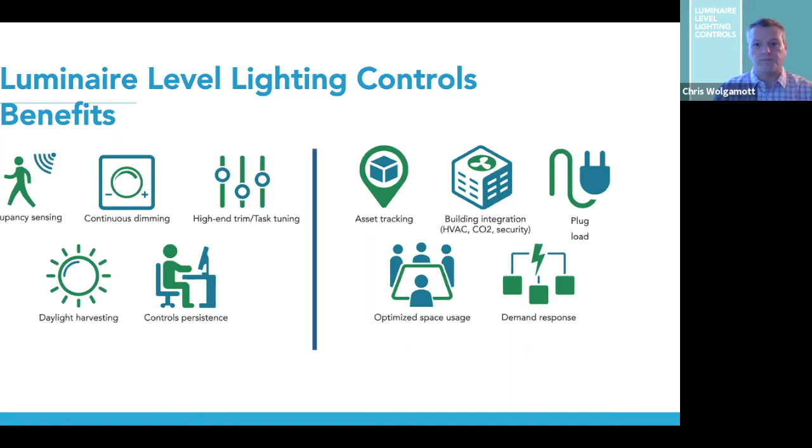All right, let's go to the next slide.

So the first report I want to talk about is an energy savings report that has been done twice. The first one was done by the DLC in 2017. And then NEEA and the DLC redid it this last year, so 2020. It's about a year-long process to do this report because we've got to get the data, work through everything.

And the reason we did this again after the 3-year mark was we increased the number of manufacturers of the products. We increased the size and the number of buildings that we looked at. We added a building type that we didn't have before. And this time we were able to analyze the effect of high-end trim versus the other control strategies. So this is kind of an interesting thing because it shows how much trim work is being done when you're using these types of systems. So let's just jump right in and talk about it.

The next slide is the finding that is pretty consistent with the last one. I think the first study came in right around 49% energy savings for all network lighting control products. And that came in again this time. Network lighting control products came in at a 49% savings. So that's the big takeaway for the network lighting thing.

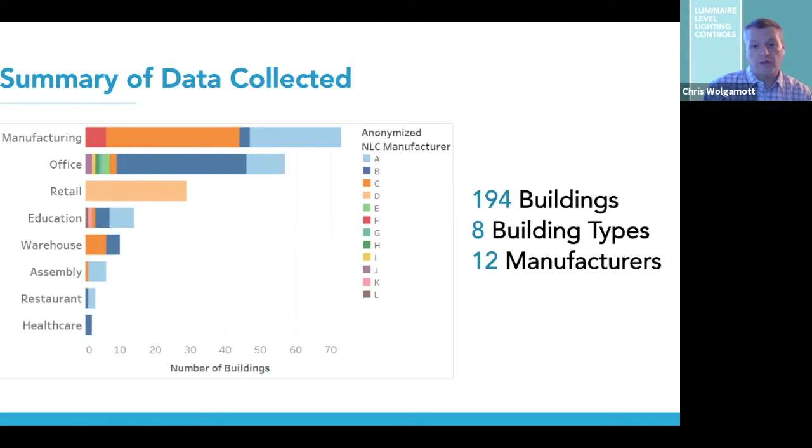Where do we get all that stuff from? We basically covered most of North America. We had 35 U.S. states, 5 Canadian provinces, and Mexico. So we got a pretty good, well-rounded look at where these products were getting installed. And as you can see, of the sample size, they're installed in quite a few places. This is just the ones that we're able to get data off of, and that doesn't count for what the actual installs are. So, next slide.

So part of this is normalizing the data. One of the unfortunate things with all this is that the data that we get from everybody is not in a universal format. It's all in a unique data format. So we had to take all that data and normalize it so that it would present the same information when we looked at it. So we weren't looking at apples and oranges, we were looking at apples to apples. So we had to go through, and this took a lot of time and effort. The fortunate thing is that a lot of the programs that we had to do, we had done in the first study, so this carryover wasn't nearly as difficult because a lot of the formats were known, and we had a way to normalize them. All right, next slide.

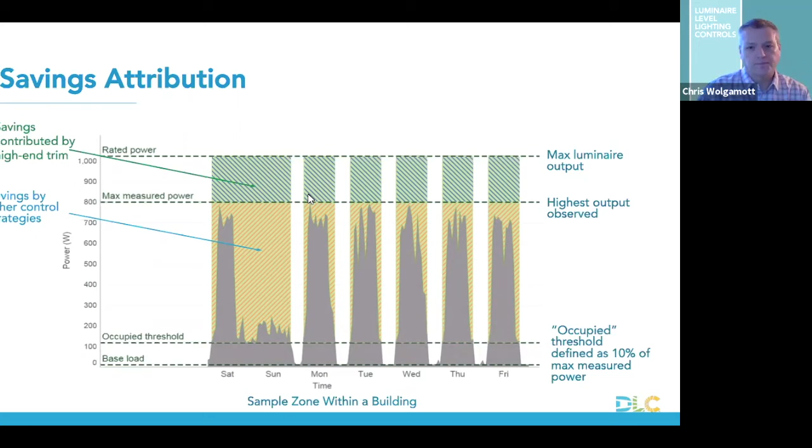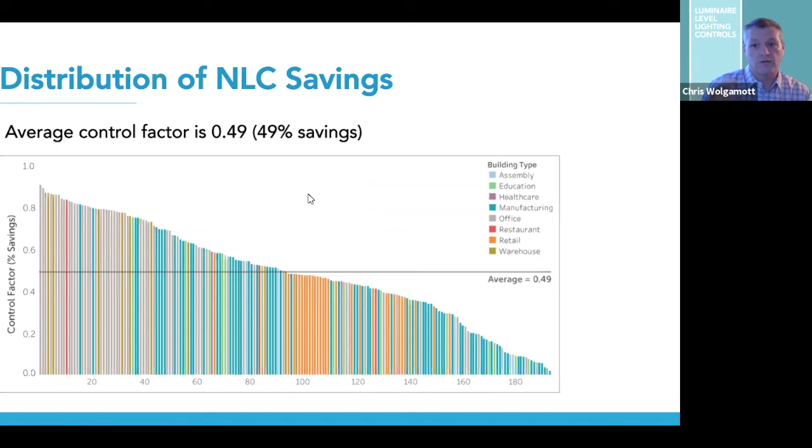All right, so again, we saw this, the average control factor across all building types and all network lighting systems was 49%, which is a pretty decent savings. And this does not account for anything that's the fixture savings. This is strictly the control savings. Nothing to do with savings going from a fluorescent fixture to an LED fixture. This is strictly the savings for the LED fixtures or the new fixtures that are in place. Next one.

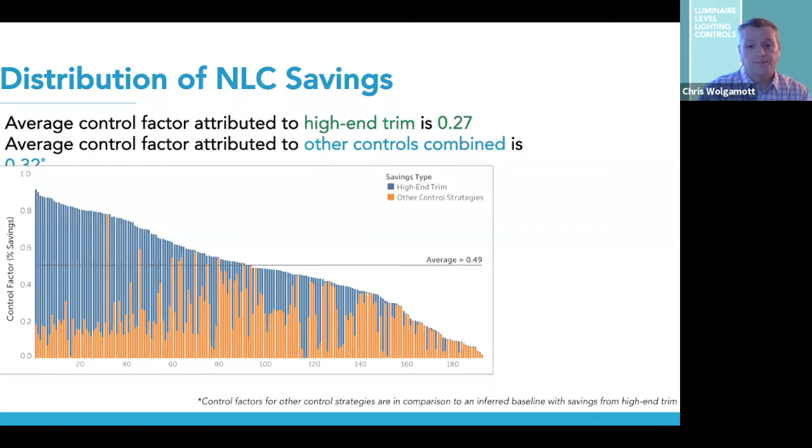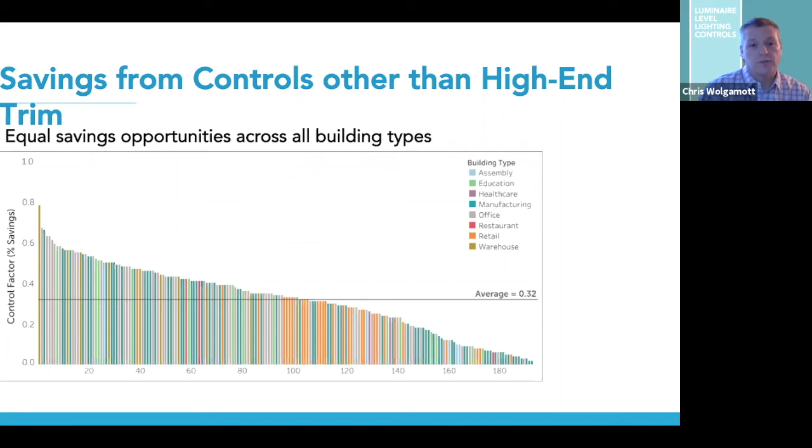And then, yeah, so this just highlights that 32% for the savings from the other control strategies, right? So still pretty good numbers on average for network lighting control. Next slide.

All right, so this is where I get excited. This, for me, is the telling feature, is that if you look at LLC and you separate that out from all the non-LLCs in the network lighting controls, the average savings factor for luminaire level lighting controls is 63%, which is significantly higher than the 49% when you average all the network lighting controls. And so we're seeing a much greater energy savings with luminaire level because of the granularity and capabilities of it.

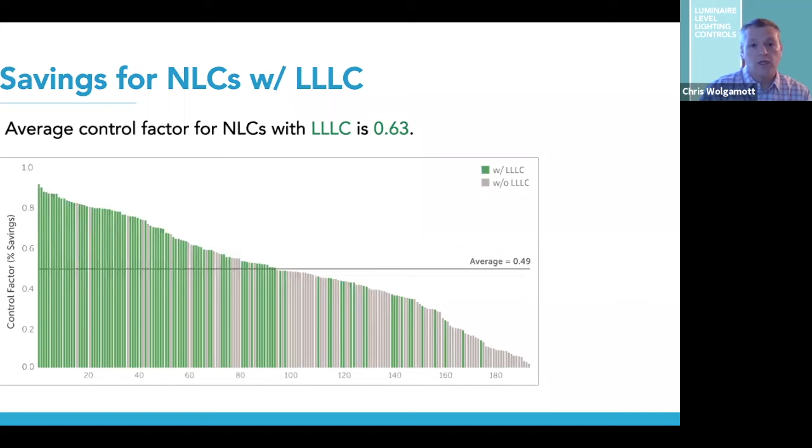So we were very excited to see that this is the kind of number we were seeing with these systems. So we go to the next slide, I think we'll see the other piece of that is that high-end trim was greater in the luminaire level. It ended up being 37% and 41% for the other control factors. So again, much larger numbers than the ones when we look at all network lighting controls combined.

And the reason we're seeing that is because you're able to go down to the fixture level. You can high-end trim the fixtures all the way down to individual fixtures or to groups of fixtures that are much smaller than you typically see in network lighting controls, which allows for that trim to be even greater, because you can trim the lights next to the window much more significantly than the ones in the interior, or however that works out, even in two zones of control pattern for the daylighting. So you can stage it and make it so that control is very specific to the zone.

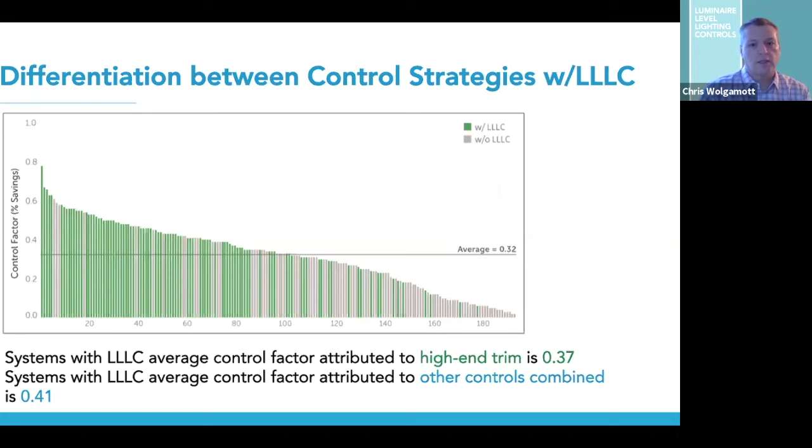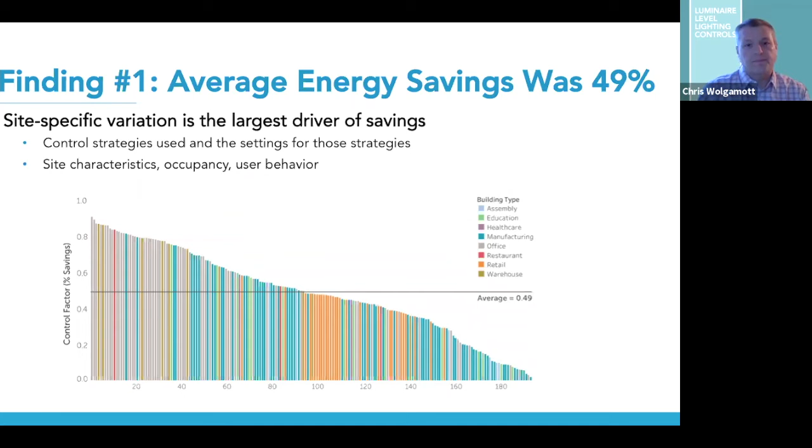Okay, next slide. And so key findings. Next one. Just again harp on network lighting controls a little bit: the savings is 49% for that, which has been consistent for 3 years. And next slide.

This is one of those ones that gets me excited. This shows the difference between luminaire level and network lighting controls, and it breaks it down. When we looked at the buildings, it was a very equal split, just about 50-50 with LLLC and without LLLC. And if you break that out and pull the LLLC out of the network lighting control, you get the 63% that LLLC saved on average, but it drops the NLC down to 35%, with all being the average of 49%. So you can see that LLLC pulls the whole network lighting control savings strategy up quite a bit, right? 14%, and that's a lot.

Hey, Chris, could I ask? Yeah. We're getting a predominant question from the chat about the source of the numbers. Could you share with us where these numbers came from? Thank you. Sure.

So we reached out to lighting and controls manufacturers, customers, and utilities, and this data came from 194 buildings throughout North America. Typically, we got it directly from the building, from their system itself. A lot of these network lighting control systems and luminaire level lighting control systems have data monitoring, and they provided that data over the time they've had it in, so that we could look at the data they were getting. So we got it directly from the customers in most cases.

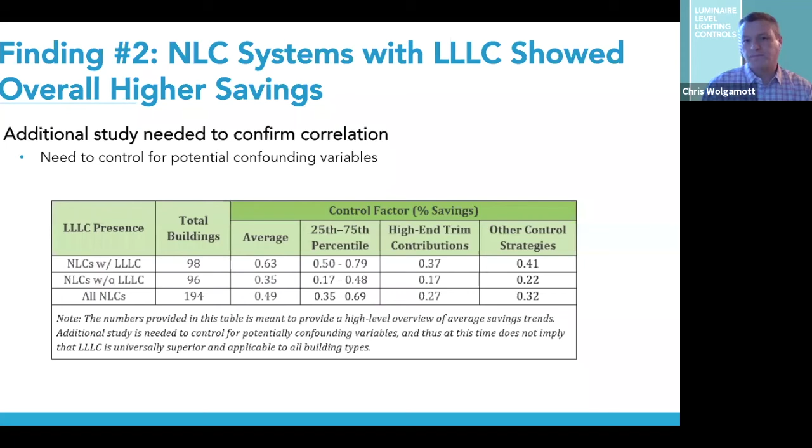All right, let's go on to the next one. I have to buzz through a little bit of this. This one probably only interests utilities, but utilities use a lot of different forms to come up with what they average the time on in buildings is. So the operating time of different building types.

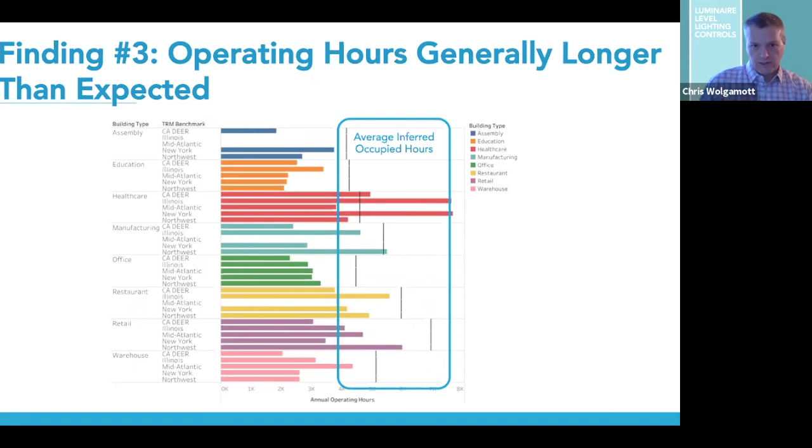And what we found during this report is that the numbers being used are significantly lower than what we saw in the buildings that had these products in them. For most it doesn't mean much, but for utilities this is an interesting thing because it changes how they do some of their math and whether they decide to increase the hours versus decrease the hours. So, okay, next one.

All right, so this is the next study. Let's go to the next slide. So I think everybody here knows what a one-for-one lighting retrofit is, right? Contractor walks in, looks up, there's 12 lights, pulls 12 lights out, puts 12 lights back in. That's just what they do. There's not a designer coming in, they're not moving the lights. They're just putting one in, taking one out, that kind of thing.

So next slide. When we looked at this, one of the things we had a question on was with luminaire level lighting controls, if I do a one-for-one. In the Northwest, we had a lot of push a few years ago for doing full lighting redesign because we wanted the most energy savings and the best lighting put into these things. Problem was they were very expensive and we weren't seeing a lot of them.

So one of the questions we have is, with luminaire level, if I do a one-for-one, because I've got this granularity of sensors and the ability to customize how the lights work, whether it's trim or how much daylighting or how much occupancy, can I get a system that is equal to a full lighting design for quality and energy savings?

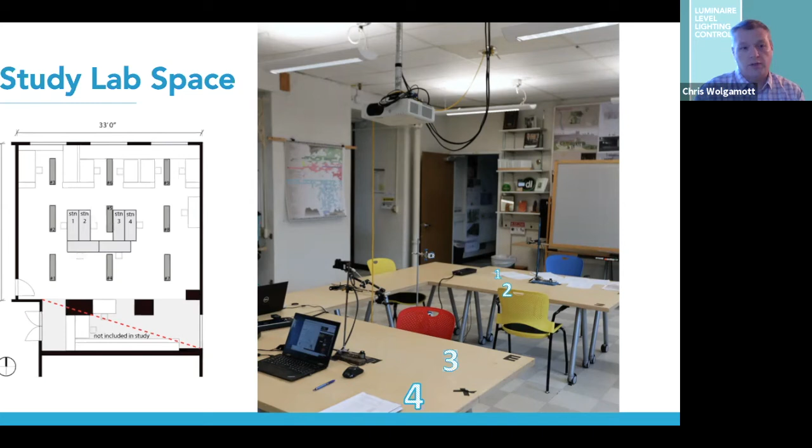So this was a space. It had an open office area that they created in the middle. It had cubicles at the wall where there were windows. And we had measuring devices everywhere to measure everything. So next slide.

One of the things we did was we tried really hard to keep the systems themselves, the output, the energy use, and the quality, lumens, color temperature, all that, as close as possible to the same based on the fixtures we were able to get with each system. So you can see we ranged from 32 watts to 35.5 watts, from 3,700 lumens to 4,600 lumens.

3,500 Kelvin for the most part. One system did go to 4,000. It was a direct indirect, so almost all of them were 60-40, but one was 50-50. CRI was 80 to 90, and we had 0 to 10 volt dimming. And each system was installed and tested sequentially in a 3-week period.

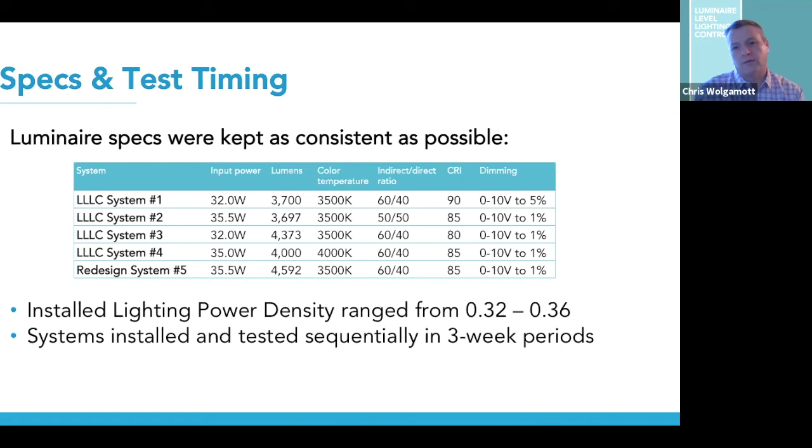I will say the last system, not that we ran into trouble, but it was being done and installed at the very start of all the shutdown for COVID. So we did not get as much data on the very last system as we would have liked, but we had enough to be able to finish the report. Next slide.

Commissioning and tuning: we did auto on, auto off, so occupancy and vacancy. The timeout was 15 minutes. Daylight harvesting was set. We tuned it to the IES handbook, so 300 lux at the horizontal work plane. Just a note, high-end trim ranged from 40 to 100% depending on the measured illuminance. So like I said, the brightness of the LEDs really changed how that worked. So next slide.

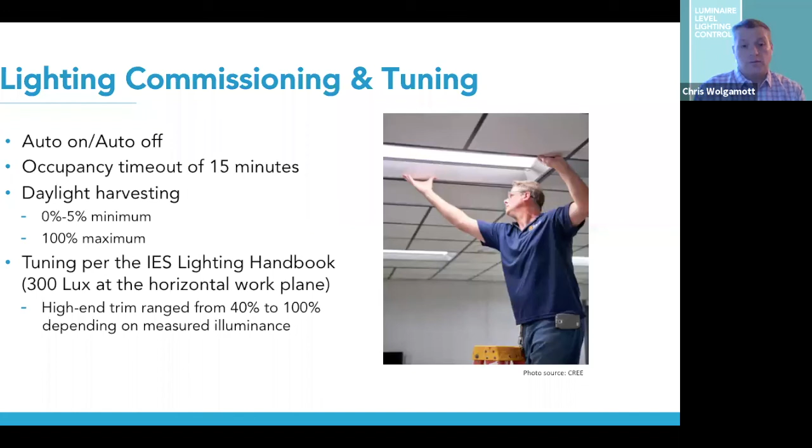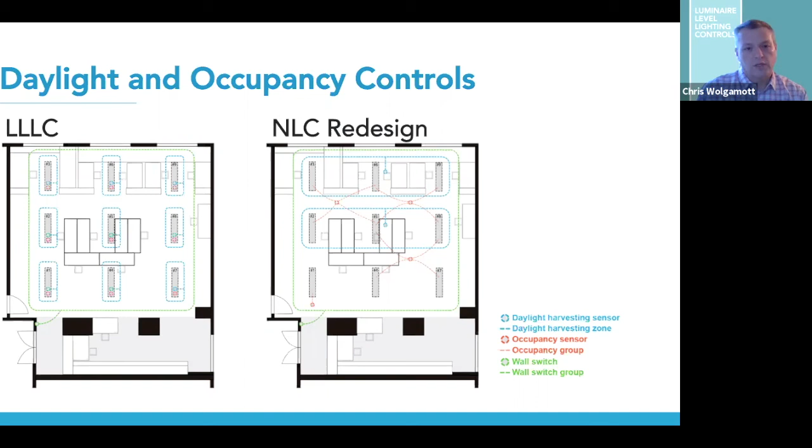So that was kind of the design work. So you can see when you're looking at this design how the system itself works and how each zone or cluster of fixtures was put together. Next slide.

These guys measured everything, more stuff than we actually needed for our study, but as it was a university, they went all out in their measuring and measured everything from color temperature to fidelity to gamut to humidity to solar irradiance, direct and diffused and everything. So we've got a ton of data from this over the course of the 5 months that we did this. So next slide.

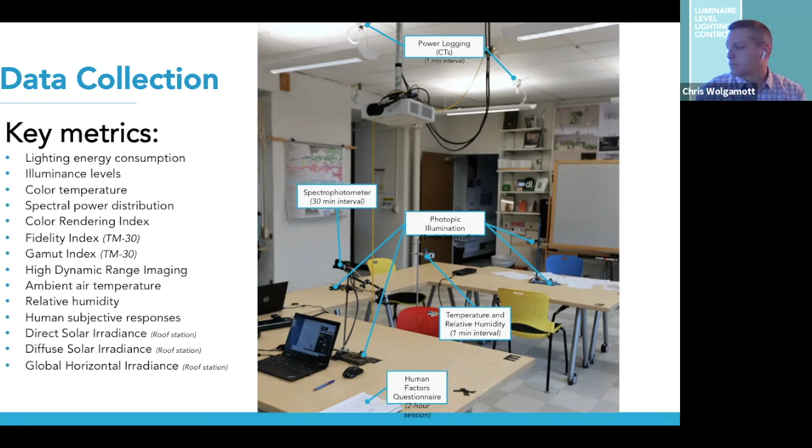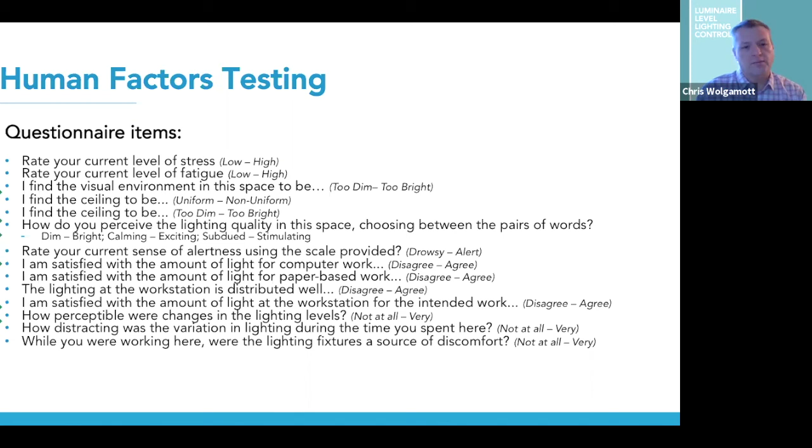This is a human factor test. Everybody that worked in there took this test multiple times and answered these questions. The ones with the arrows are the ones that kind of go to quality of light and whether they liked it or not. Next slide. Here's the results. So next slide.

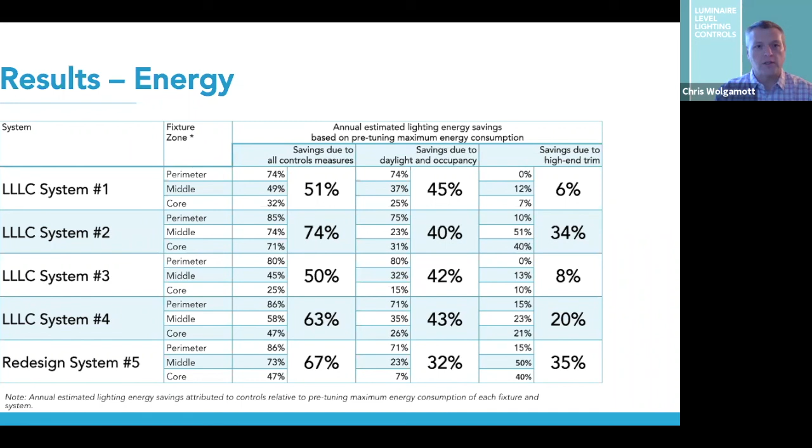So these were interesting findings for us. It confirmed exactly what we thought, that energy-wise we could save some energy. The next slide will show some of the human factors results, which was that there wasn't a real big difference between the LLLC systems and the redesign. It didn't prove that one was better than the other, but it didn't say one was worse than the other either.

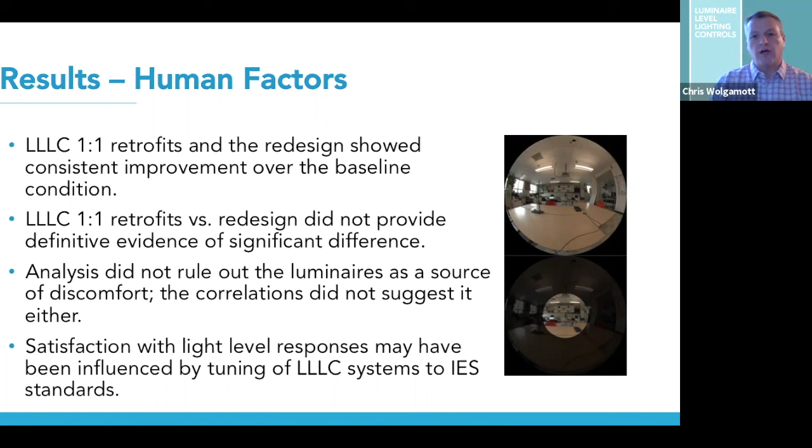So the occupants were satisfied with all of them, satisfied with the luminaire level version, satisfied with the networked lighting control. Again, the goal wasn't to say luminaire level is better than a full redesign, but to say that you can get equal to it without having to spend as much money, showing that LLLC does provide quality lighting and energy savings in a space. Next slide.